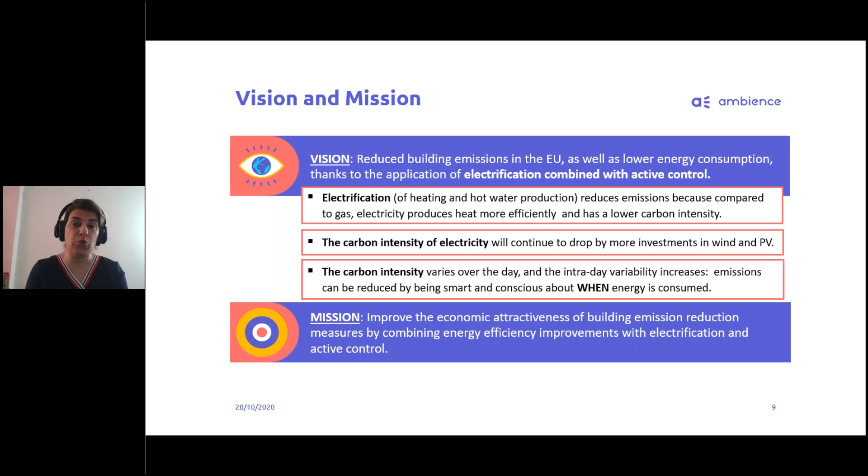So by encouraging the installation of local production, or encouraging the investment in renewable resources, alongside the electrification, which gives us flexibility in order to combine the consumption with this uncertain amount of production, we can achieve both the flexibility that we want and the lower CO2 emission that we want. And these two aspects will give us the consciousness to optimize our consumption in a way to understand when to use this consumption and when to use these local resources that we have, further achieving cost savings and CO2 emission reduction.

The goals in Ambience project are first to extend the energy performance contract to include and incorporate demand response value streams by valorizing the flexibility that can be achieved in active buildings. And by active buildings, we mean those buildings that are equipped with meters, sensors, and ICT technology that help us to optimize the usage of already flexible resources such as storage or PV panels that are available in some buildings.

After that, we want to make this active building EPC concept applicable to a broader range of buildings. The current status is that mainly energy performance contracting is applied to public buildings or commercial buildings, and there are very rare cases of residential buildings, even though those have single management and single owners, such as social housing. So what we want to do is to extend this application to a broader range of buildings, as well as extend it to cluster buildings and try to add the concept of energy community to this aspect.

And in order to do so, we are also developing a tool that supports the forecast of demand response value streams by evaluating and estimating the amount of flexibility that can be achieved in the contracting phase, and then supported with the matching measurement and verification methodology for the operational phase, in a way to guarantee this added value stream for those that are going to be involved in this project. We are also going to validate this concept and the tool that we are developing in 2 pilot buildings in Portugal and Belgium, involving real buildings and real ESCOs.

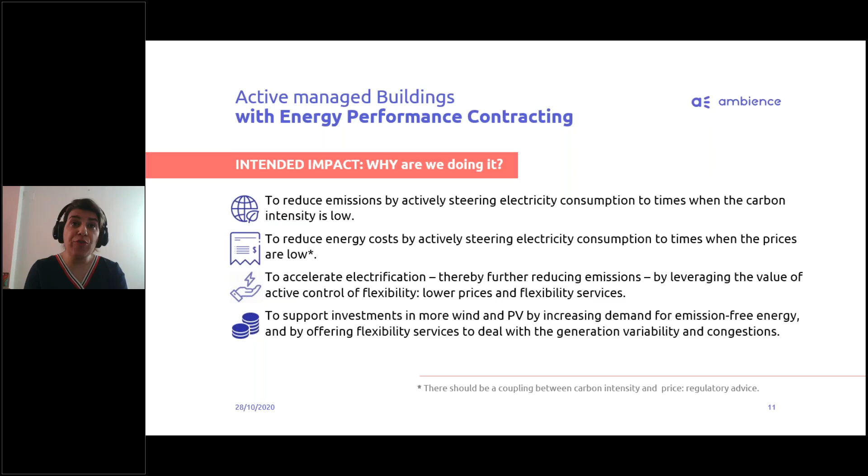And as I mentioned before, the expected impact of Ambience project is to reduce emission by actively steering the electricity consumption to times when the carbon intensity is low, as well as shifting it to the times that the price is low, so that we could reduce the total energy cost. And by adding this to the business case and supporting it with a proper business model, we want to support the investment for accelerating electrification in the building sector and encouraging the investment in renewable energy resources to achieve that ultimate goal of reducing the CO2 emission and encouraging the flexibility on the demand side and improving the demand response business case as well.

We have identified several beneficiaries in this project. One of them, of course, is environment and society, because our main vision being to achieve reduced CO2 emission, environment and society are going to benefit from that. Consumers: we are giving a main focus on the demand side, and the consumers, what their preferences are, what their comfort requirements would be.

So consumers would be one of the main beneficiaries, as well as other more general aspects of achieving a better cost-effective aspect in their buildings, having a better, more efficient building.

And one of the most important beneficiaries in these projects are energy system stakeholders, DSOs, TSOs, utility providers in general, because not only can they benefit from the investments that are coming to their sector for installation of wind and in general renewable resources, they can also leverage this flexibility that is being added from the demand side, and they can use it for the operation of the system.

And of course, ESCOs, being the main actor in the energy performance contracting scheme, with an enriched business model and an enriched business case, they can achieve better prospects in their activities.

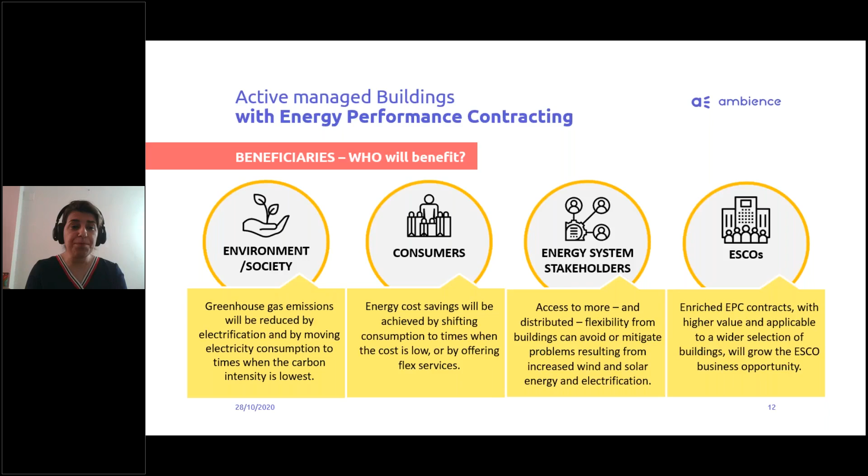Ambience project started in June 2019 with 8 partners from 4 different countries and from research and commercial sector. We are in Portugal, Spain, Italy, and Belgium, and this project is going to continue until May 2022. It has been funded under European Horizon 2020 calls, and it has a budget of around 2 million euros.

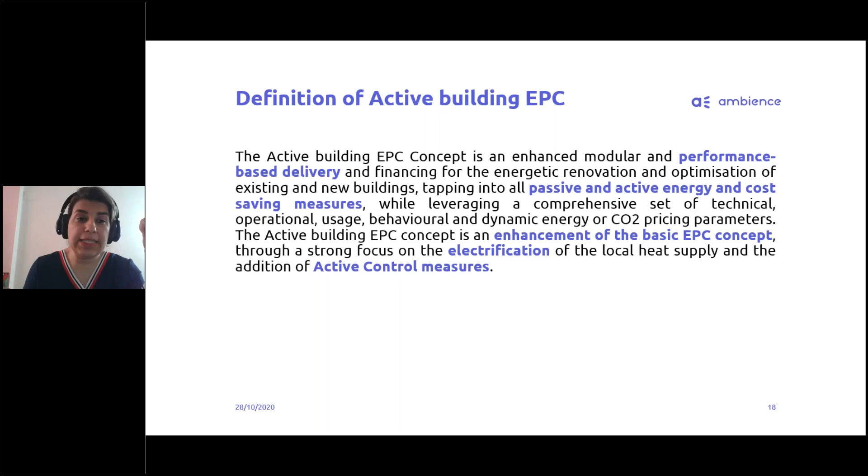There's also another aspect that we need to consider, which is that our proposal is a modular one, and this helps it to be applicable to already existing energy performance contracting, so they can only take the modules that are necessary for them, or they can start a whole new active building energy performance contracting on their own. And of course, we are considering existing buildings and new buildings to be able to be incorporated in this new definition and concept.

So there are three main pillars for this new concept. First of all, extending the energy performance guarantees from energy efficiency to also flexibility related measures; extending it to a broader range of buildings, residential, hospitals, educational centers. And the third one is to extend this scope to a cluster of buildings, adding the local energy communities and what could be the business models that could emerge from having these energy communities.

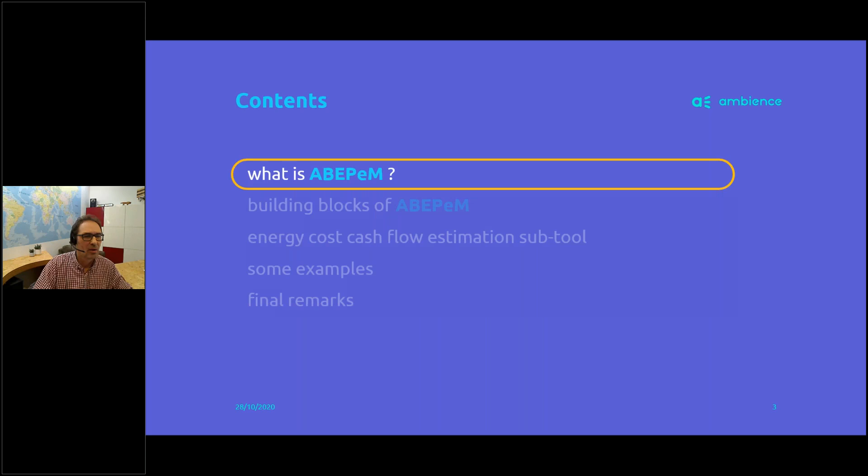ABEPeM is, in my opinion, still very difficult to pronounce, but it is the acronym standing for Active Building Energy Performance Modeling Platform. And we try to achieve three main things with this platform. The first thing is we are calculating the operational cost savings and performance KPIs when you want to do certain renovations, and that will be used as a basis for the guarantees which will later be defined in the contract between the ESCO and the final customer. Secondly, it will help you to calculate the financial viability of your renovation, including standard renovations or renovations which include smart control.

And third, it will be used again at the moment that the renovations are done and you are in the performance phase, the performance evaluation phase of your project. A couple of corrections might be needed.

The very simple example might be that in the contracting phase of your project, your customer tells you that it is an office space which is manned typically on weekdays from 6 o'clock in the morning till 7, 8 o'clock in the evening. And suddenly during the performance phase, you come to the conclusion that he converted it into a call center which is manned 24/7. So that might have quite an impact on the energy consumption and so on.

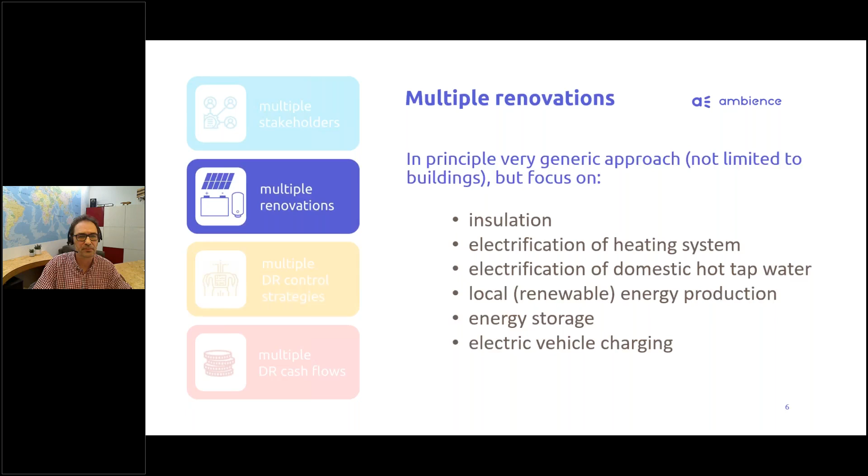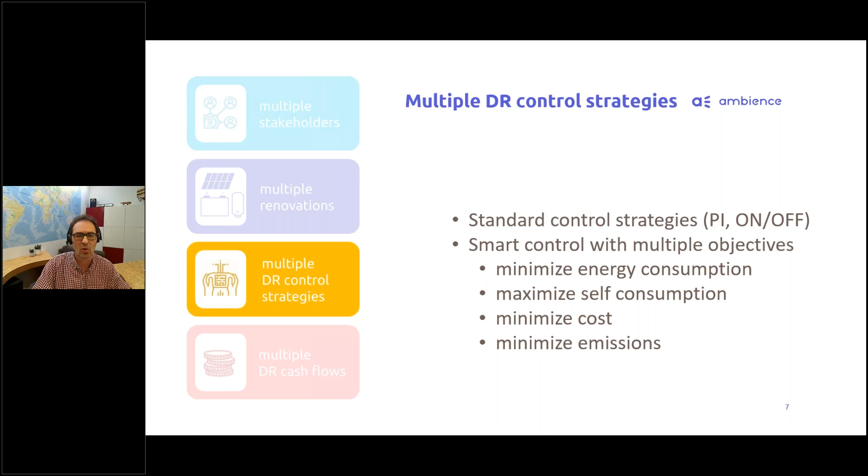We will be able to do some calculations for very standard control strategies, just simple on-off control of devices, but also the advanced ones we need in the context of demand response. So we support smart control with multiple objectives, whether you want to minimize energy, maximize self-consumption, minimize your cost, and so on. In principle, we try to support that all.

And last, we have at this moment quite a focus on indirect demand response schemes, where we try to motivate customers to change their energy consumption behavior based on some price incentives. Whether these incentives come from variable prices over time or time of use, or differences between injection and offtake tariff, trying to reduce peaks and so on. That's all supported, but there's quite a focus on the indirect demand response scheme in the platform at this moment.

And that brings me actually to the first poll. What type of demand response do you think is the most suitable in buildings? Do you think it is rather direct demand response, typically a contractual agreement between the building owner, maybe the ESCO, and an aggregator where he contractually has the possibility to switch off some devices if the conditions in the grid are asking for it? Or indirect demand response, being more incentive price based? Do you think both are suitable, or you don't really have an opinion on that one?

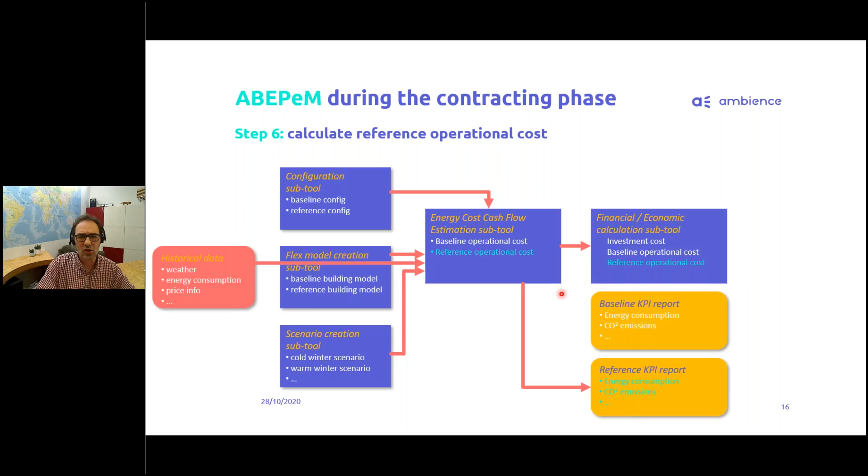That information is also given to the financial economic calculation subtool, and by subtracting the two operational costs, you know your operational cost savings. The financial economic tool then knows the investment costs, knows what the operational cost savings are, and can then generate an investment report where all the typical numbers which financial people like, net present value, return on investment, and so on, are nicely represented.

It's also in this part of the tool that we can define the role of who we are looking at in this project. Are we talking about an owner of the building? Or do we look at the return on investment for a financing company, and so on? So that's all configured in the financial economic calculation subtool.

Good. What I explained to you here is all during the contracting phase. All the information which is generated here is used by the ESCO to get a good feeling about what he can promise to his customer. They make an agreement, they start doing the renovations. After the renovations, you are going to evaluate whether you stick to your promises. And that's the second time that the platform will be used.

We are collecting operational data that is given to the guarantee assessment subtool, which does a couple of reruns on the energy cost cash flow estimation subtool in order to make some corrections on the actual KPIs. So we have corrected KPIs, and it's the input for the IPMVP report, which can be used in the discussion with the customers to evaluate whether the promised results are achieved after the renovation of your building.

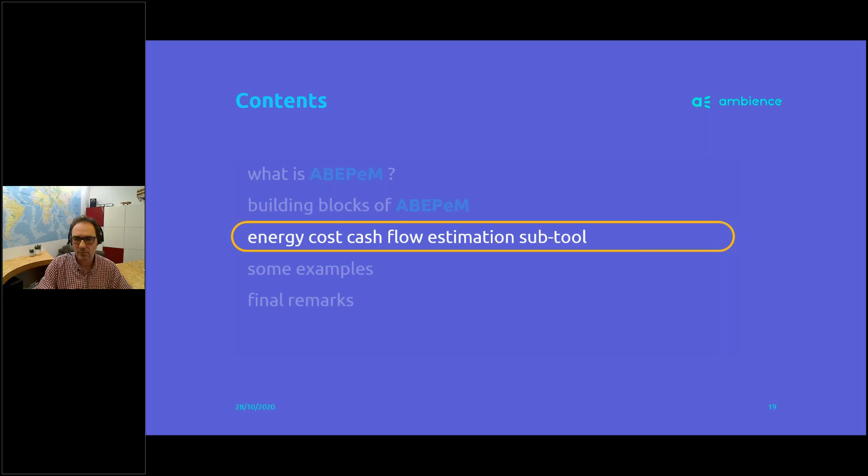This part, the energy cost cash flow estimation subtool, is based on a multiple collector concept. What we do is start identifying which commodities we have in the building. Typically, you will have electricity, you will have gas, you will have hot water for your heating, maybe you have cold water for the cooling of your building.

Then we start adding commodity consuming devices to that collector system. Typically, there will be what we call uncontrollable load, all the devices which consume electricity but you cannot really control from a demand response point of view. You'll have space heating, which uses hot water. You'll have hot tap water. You'll maybe have the use of cold water to do the space cooling of your building.

Then we go to the commodity producing devices. Typically that will be, for example, PV panels on top of your building which will produce electricity and inject it into the electricity collector.

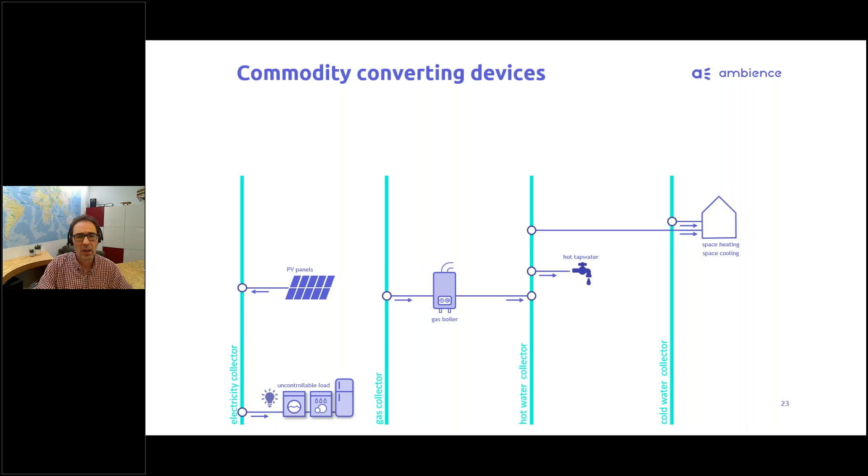Then we have commodity converting devices which we add to our model. Typically that can be a gas boiler before renovation, a heat pump after renovation, maybe a CHP if you have a big building where you have an interaction between three commodities. You produce electricity and hot water starting from gas, your air conditioning system, and so on.

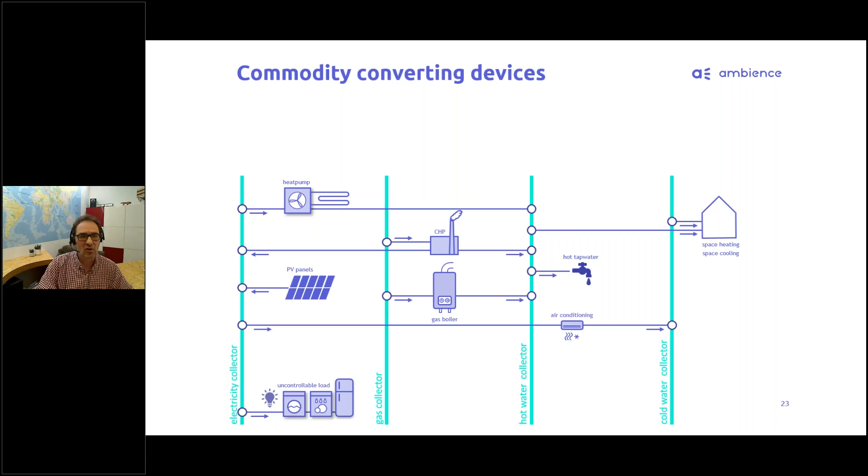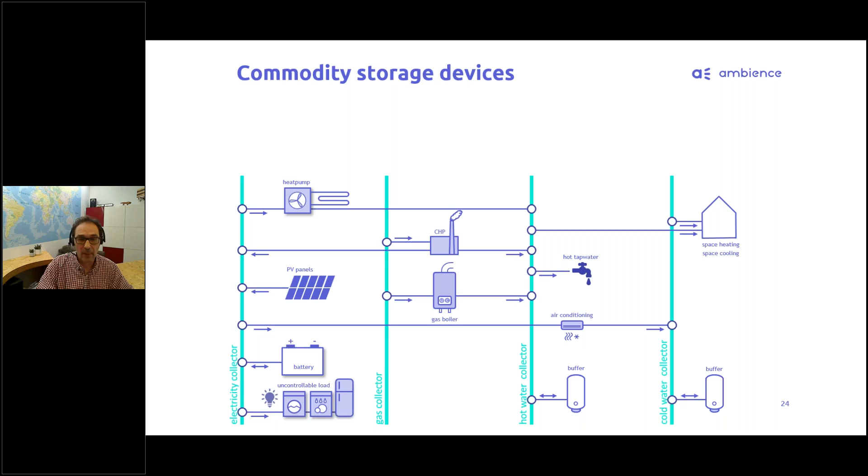Then the last group are the commodity storage devices. You can add batteries at the electricity side or buffer tanks on hot and cold water to store these commodities. Of course, most buildings are not in island mode. They are typically connected to the outside world.

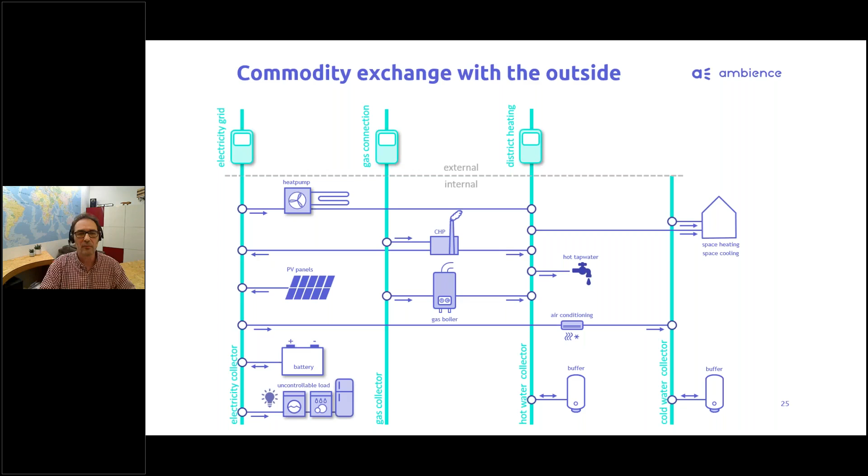So we allow, of course, interaction with the electricity grid. You'll have to buy gas from the gas grid, most probably, if you have a gas boiler. And there is even the possibility that if you have hot water in your building, you're connected to a district heating system. So that's the exchange with the outside world.

And then we are going to do operational cost couplings to all these commodity flows. Of course, electricity will cost money if you buy it from the grid. Maybe you get a tiny bit of money when you inject in the grid. You'll have to pay for your gas. You'll have to pay for your district heating hot water. And maybe you can even inject a tiny bit in the district heating system when you have excess heat available in your building.

Keep in mind, we can not only couple costs to the exchanges to the outside world, but any flow inside the building can have a cost coupling as well. An obvious one, for example, could be the PV panels. It's perfectly possible in a certain business case that an external investor put the PV panels on top of your building, and that you don't have to pay for the investment, but that you have to pay for the electricity which comes from the PV panels for local use, hopefully at a lower price than buying it from the electricity grid.

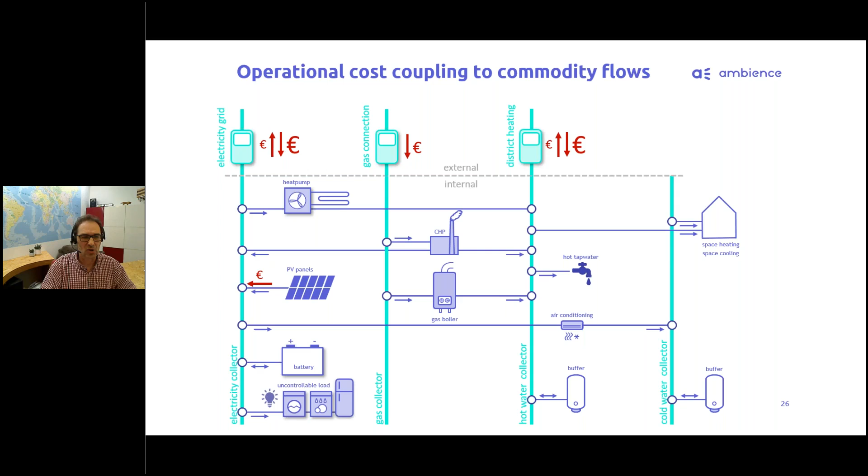So that's actually how we built up, in a quite generic way, our simulation model. Keep in mind, the collectors I show here are just examples. If tomorrow hydrogen gets very hip, we can perfectly add a hydrogen collector there, or whatever commodity you need in your building can be added in a very flexible way in the simulation tool.

Good, that gives us what we call the building and infrastructure simulation model. We make two versions of it, one before renovation and one after renovation, which we will then run a couple of times through the platform. As any model, we have a whole bunch of non-controllable inputs, typically weather data and so on. But we have quite a couple of controllable inputs. Typically the heat pump control, buffer charging and discharging, charging of batteries, heating control in the building, that kind of things we can control.

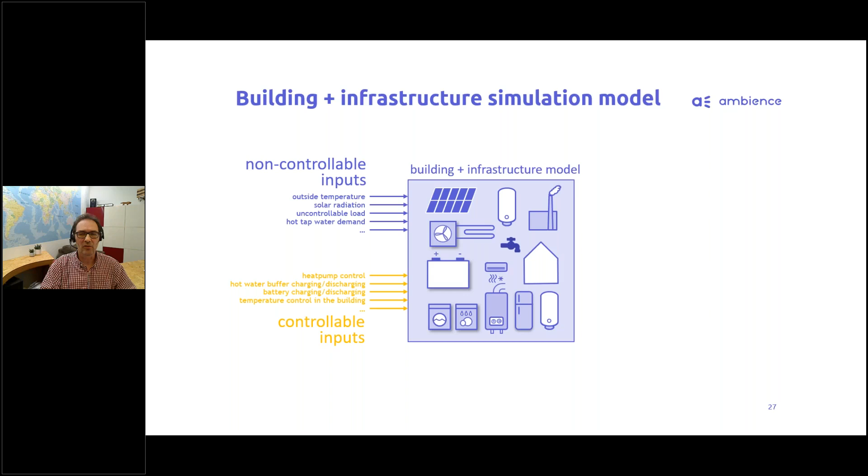The model will then, based on these inputs and the internal states of the model, generate a whole bunch of outputs, internal temperature in the building and so on. And also keep track of all the commodity usage in our building, where the costs are associated to, so that every time we do a simulation run, we get a clear view on all the commodity usage and cost.

Good. The model is reused three times in the approach we have in Ambience. The first time is in the contracting phase, in the sub-tool I just explained, to estimate the value which can be achieved for the customer. Second time is in the operational phase. When we are actually going to control the building, we use a model predictive control approach, which uses this model again. And the third time is in the performance phase, where we can do a couple of reruns in order to validate the promised performance to the end customer.

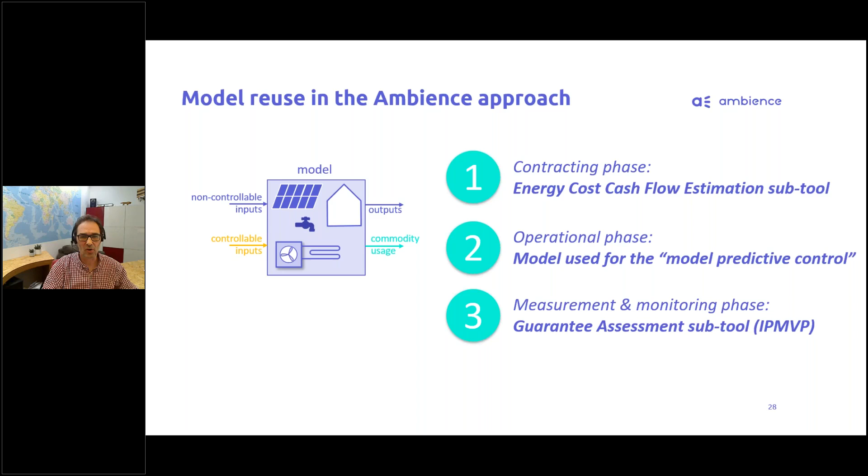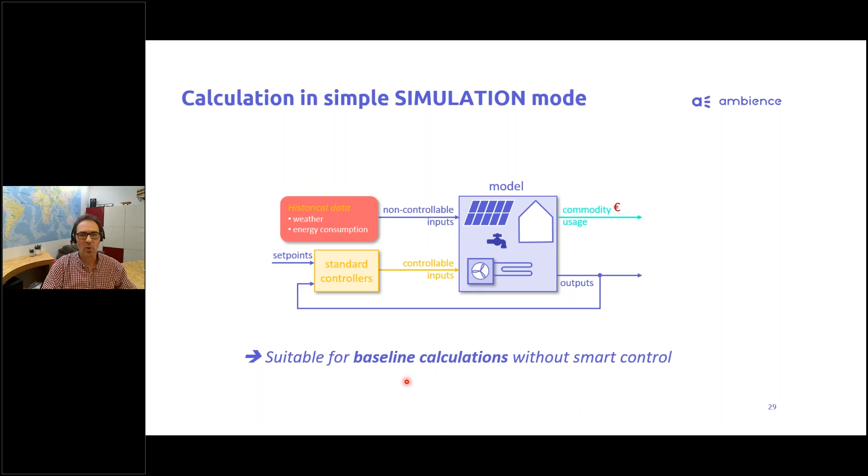Good. There are a couple of simulation modes we support in the tool. I'm going quite quickly over them. You can do simple simulations, just standard control. This is typically very useful for baseline calculations. Typically, you have a heating system which just goes on and off, doesn't do anything smart.

We can run in full optimization mode. That means that we can calculate the maximum achievable value of all the smart devices in the simulation model. It's a pure optimization where you know perfectly well how all the data is going to evolve. It typically overestimates the value of what you can achieve, but it's still very interesting because it defines very well the upper bound of what you can achieve in your building.

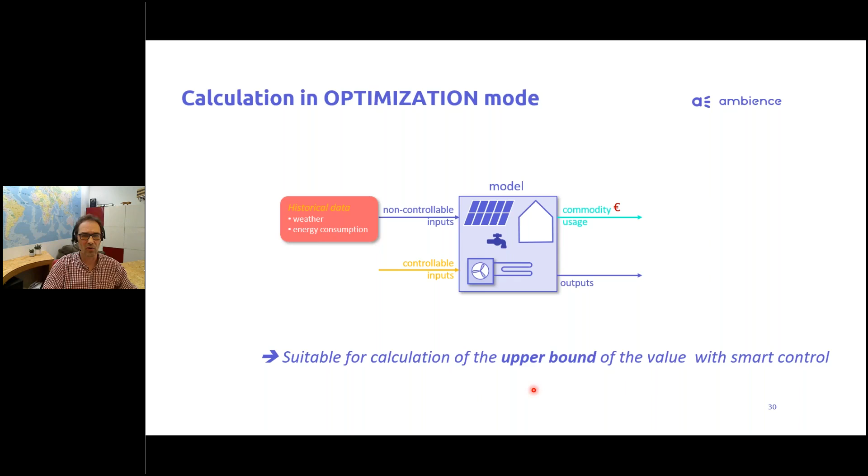And then the third one, that's a pretty advanced one. We're still working on that one. I'm not going to try to explain this. Either you know what MPC is and this slide speaks for itself.

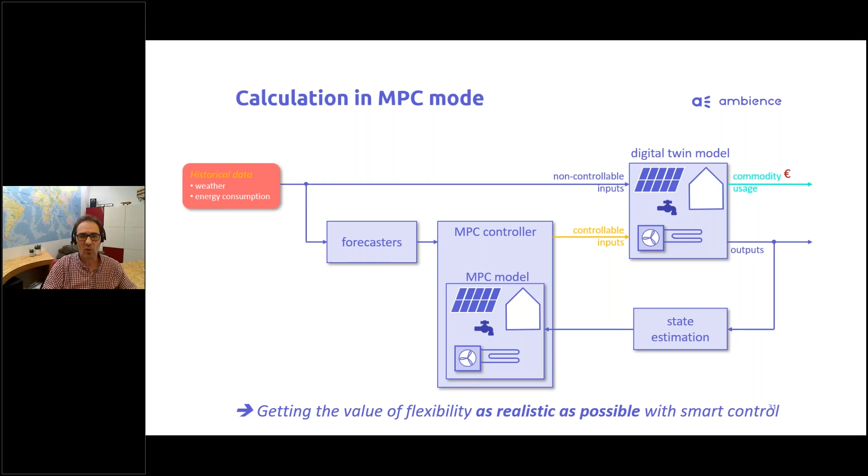If you don't know what MPC is, then you only have to remember that we do this in order to get a value out of the tool which is as realistic as possible of what we can achieve when we are actually going to implement it in the building.

Then, as I told you before, we need thermal models. The thermal modeling is all simplified RC models. I'm not going to talk too long about it. Just keep in mind we have two approaches. The first approach is that, based on historical data, we have a gray box modeling tool which can fit these models onto the actual data.

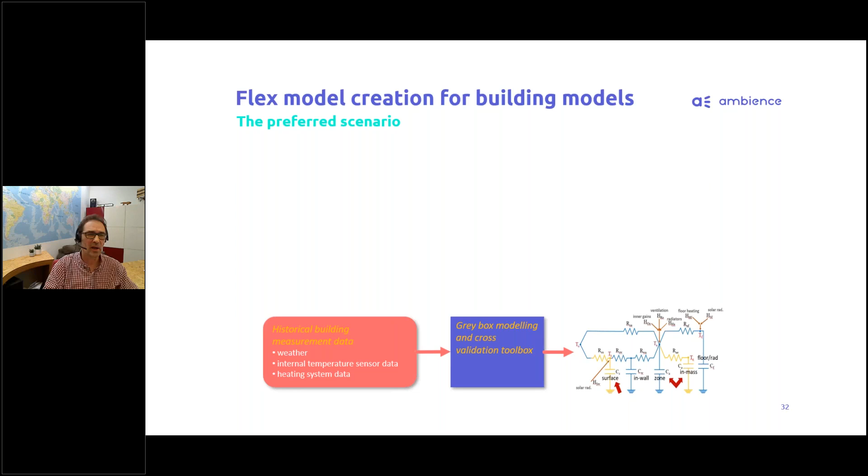We are very aware that older buildings don't have a lot of data available, so we have an alternative path in place where we start from the building plans, from standard building stock information and so on to generate data for that gray box modeling toolbox. We have been using this already in other projects, and that works quite well.

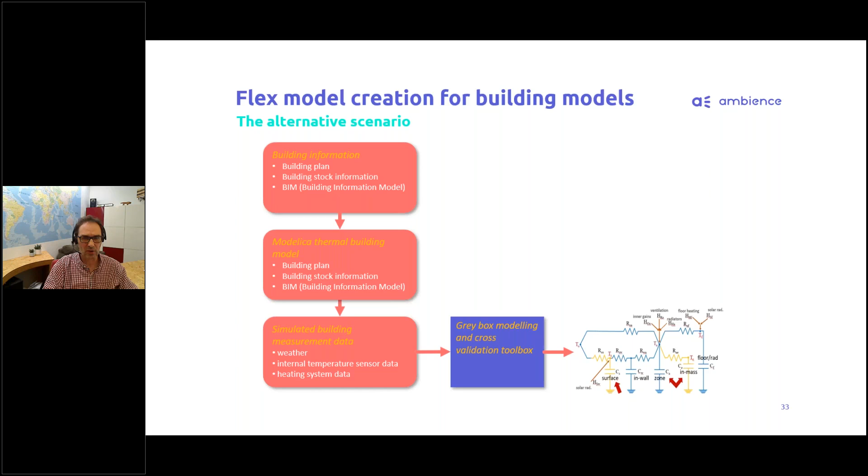Good. Maybe all this was a bit boring and you want to get a better vibe of what we try to achieve with our tool. I hope I can come to that in our example bit. I'm going to start with a very simple example, and I am only focusing on the business case for one day, not so much because we can't do better than that, but because it makes it very tangible what we actually do in the platform.

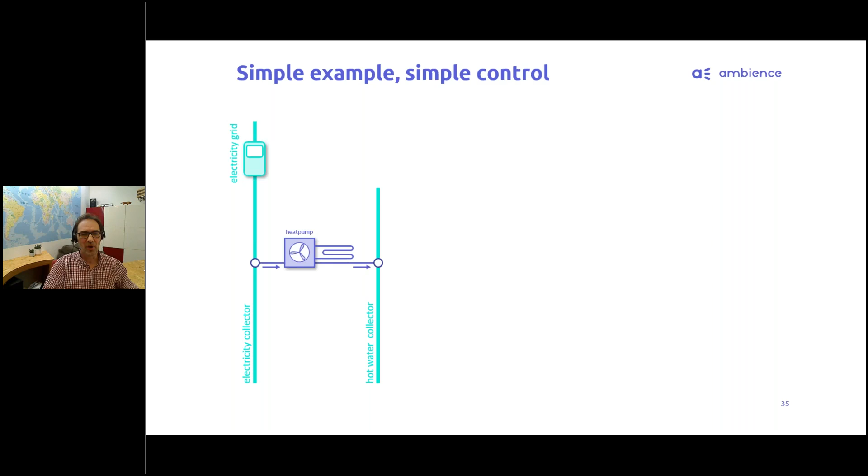We have a configuration: we are considering a house which has electricity, it has hot water. The heat pump makes sure we have the hot water, we have tap water consumption, and we have PV panels in our building. That particular day, it's quite a sunny winter day. Keep in mind our PV panels produce about 29 kilowatt hours of electricity during the day. We have a bunch of uncontrollable devices. They consume electricity a bit during the day. It gets a bit more from 4 or 5 o'clock onwards.

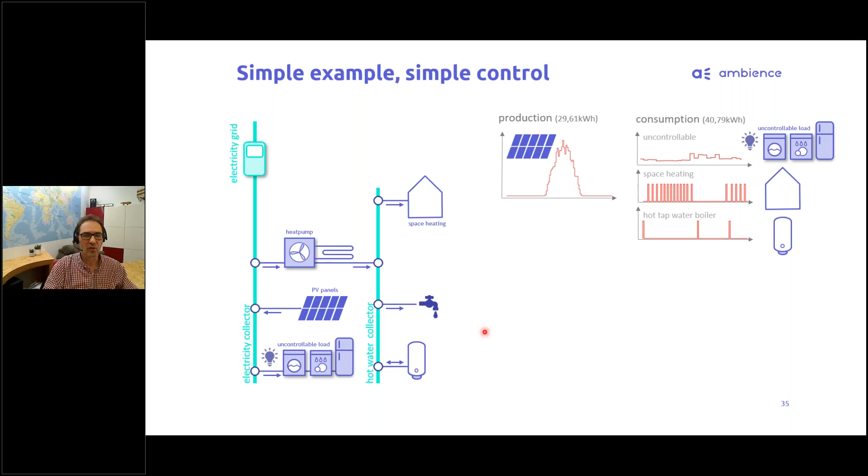As usual, we have space heating in our building. This is the reference simulation, so the heating system just switches on every now and then to keep the temperature in the house comfortable. In the afternoon, no heating is needed because the sun is taking care of that, and then in the evening it switches on and off again a couple of times. Then we have a hot tap water boiler. There's not an awful lot of hot tap water used during that day, so it switches on at 3 quite random times during the day.

And then we have an electric vehicle which is plugged in at some point in time. It's just charging till the battery is full. This is the reference or baseline simulation where we don't do anything clever yet. And you see, of course, that we don't take advantage very well of the big PV production peak here. We see a lot of electricity consumption before it and after it, and in practice, out of our 30 kilowatt hours, only 10 kilowatt hours is consumed in the building itself, and 2/3 of it is injected in the grid.

Now, why I showed this simple example is because you have to keep in mind that all the simulations we do are data driven. So we are going to step by step calculate what is going to happen in the building based on historical data, or based on forecasted data in the MPC approach. So we can, of course, do better.

If we make it all smart, we make the boiler smart and the space heating smart, and we do smart charging on the car, you see, of course, what happens. The uncontrollable load and the PV stay the same. The space heating tries to buffer some heat in the building, in the building walls. It tries to push it to the maximum allowable temperature without violating constraints there. And the boiler starts charging at a smarter moment in time.

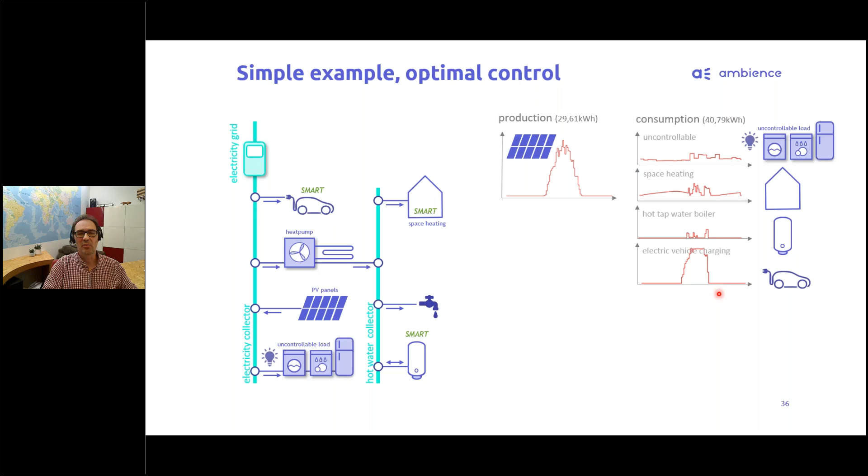The electric vehicle charging starts a bit later at a bit higher power in order to come to the perfect, of course I picked out a perfect day to show off what an optimization can do. Of course, no injection in the grid anymore. So that's in order to show how the tool actually works: calculating all these time series, doing the control, doing the optimization, really on the time series.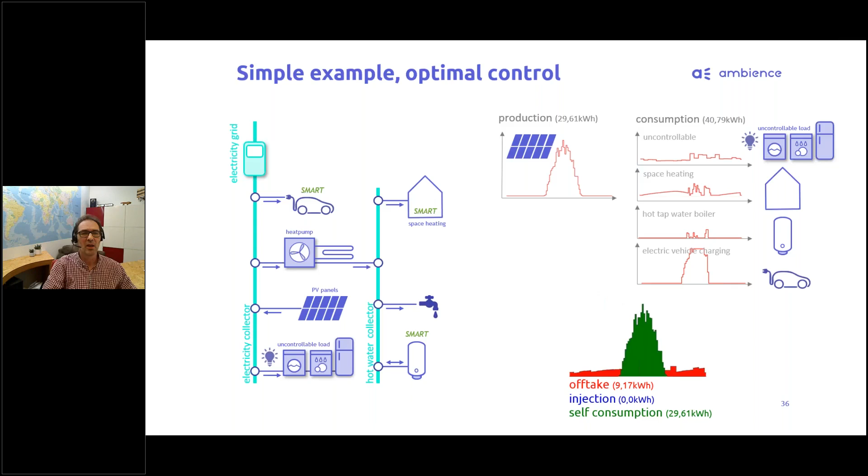A more realistic example of what we can do with our tool is shown in the next example, where we have an example renovation of a family house. Again, we have electricity, we have gas before renovation, and we have hot water.

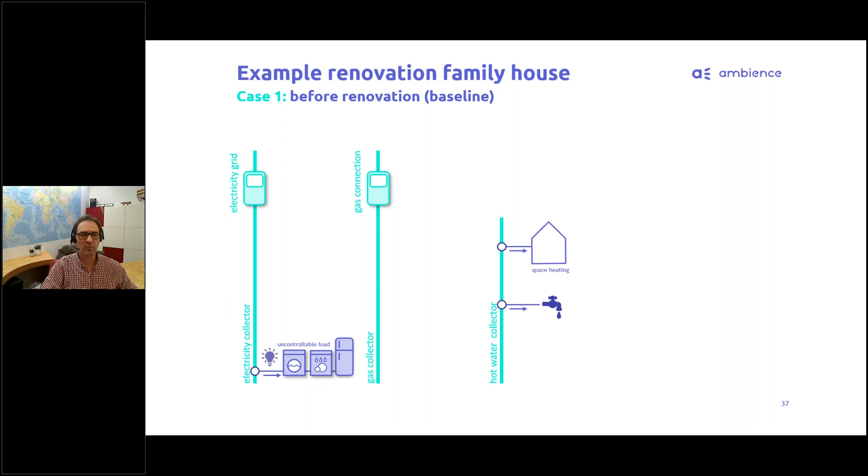The uncontrollable load, we have space heating, we have hot tap water, we have a buffer for the tap water. In first instance, the house is still heated by means of a gas boiler, and the setting is in such a way that we pay about 26 cents per kilowatt hour. Our residential price is 26 cents per kilowatt hour for electricity and about 5 cents per kilowatt hour for gas.

So in the first run, before renovation, before we do anything smart, we can calculate on a year basis that the estimated gas cost is about 1,600 euro, electricity will be 960, in total 2,600 euro per year.

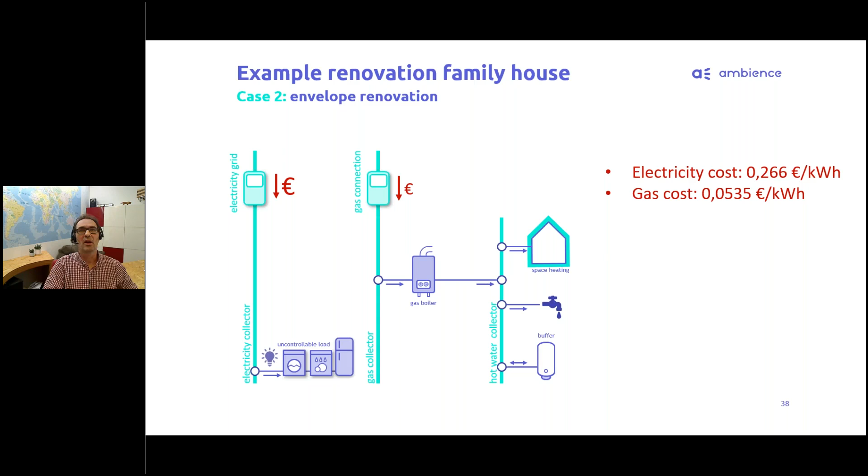Then we change our configuration, that is our reference configuration, where we do first an envelope renovation. So you see here, we insulated our building, we put insulation in the roof, we changed to double glass in the windows, of course with the same prices, where you see immediately the impact on the gas consumption, which drops quite a bit, which results in a first cost savings of 39%. So that's a first after renovation estimation of costs we will end up with.

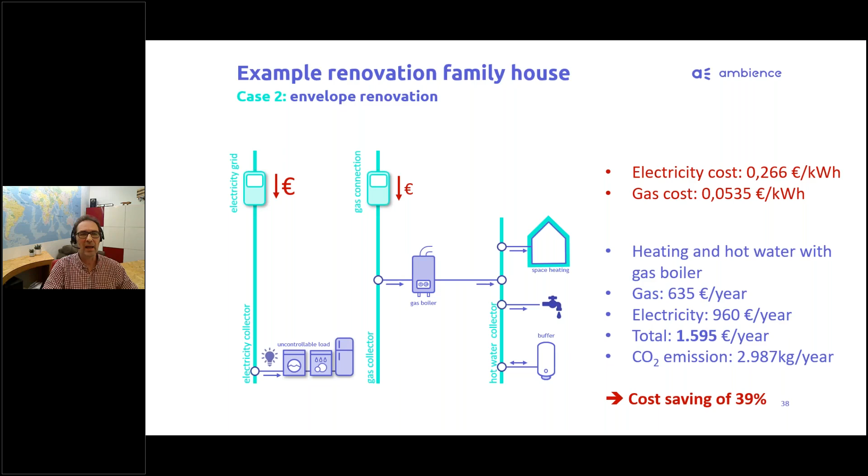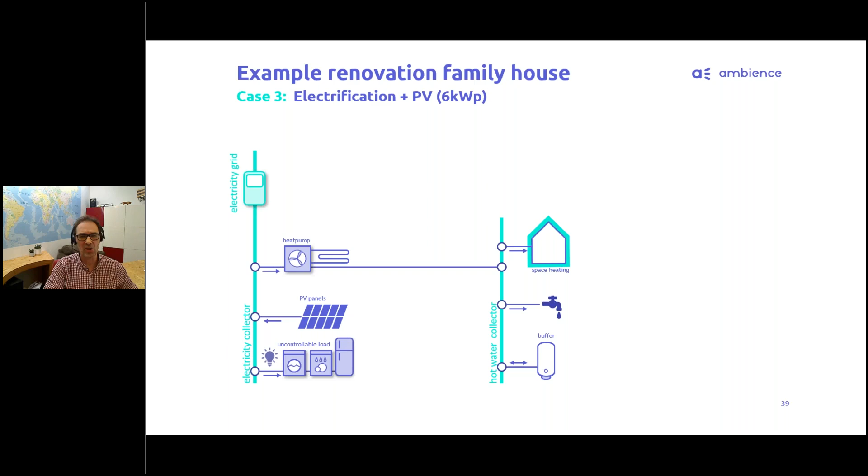But we can go step by step, adding elements to our renovation. The second one is we are going to do electrification. We are going to add a heat pump and PV panels to our configuration. We stay with our insulated house. What you see happening now, important here is that we now assume that you can inject some excess electricity in the grid at a price of about 9 cents. That's rather high. In later simulations, we lowered that a bit to be a bit more realistic.

What you see here is, due to this electrification in combination with PV panels, we can have a further cost saving of 28%. And the last step, and that's the one which is very relevant for our project, is we add the smart control. We add a smart controller which is going to optimize the behavior of the buffer tank here and the heating system in such a way that you make maximal use of your locally produced renewable electricity.

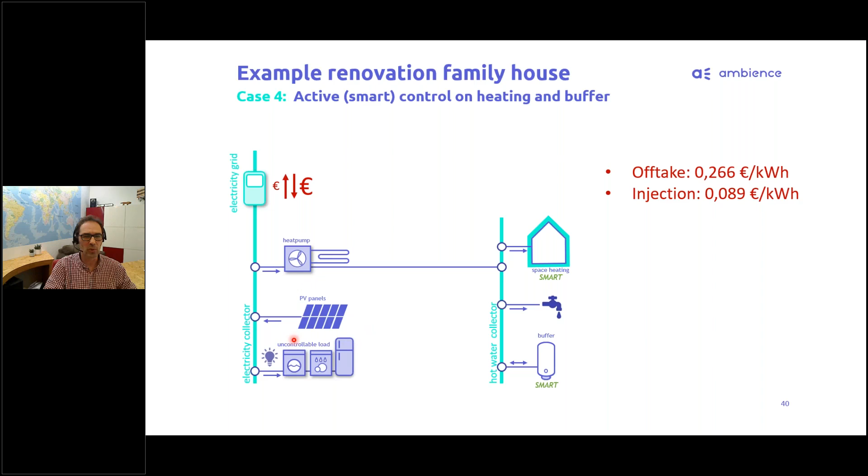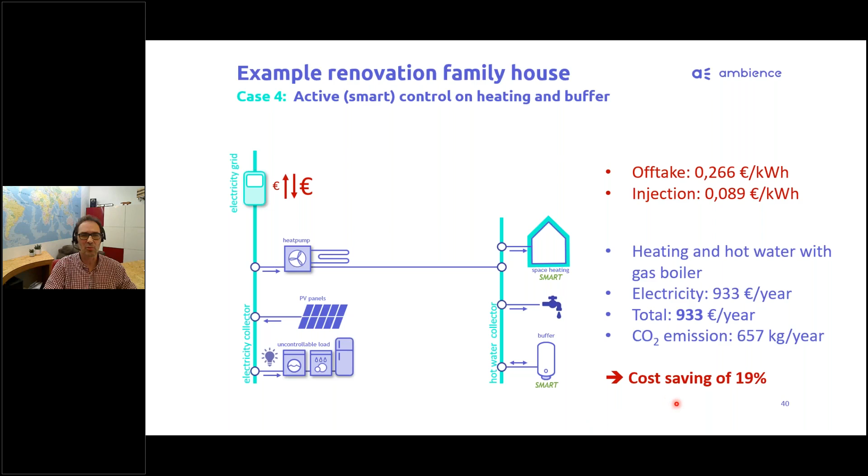What you see happening here is that you have a further drop of your electricity cost. So in the previous one, it was 1150, down now to 933 euro, or an extra 19% extra cost savings. Keeping in mind that that is for an investment which might be rather small. If you already have like a renovation with modern new devices, adding that smart control does not have to cost an awful lot, but can give quite an additional savings at the end of the line.

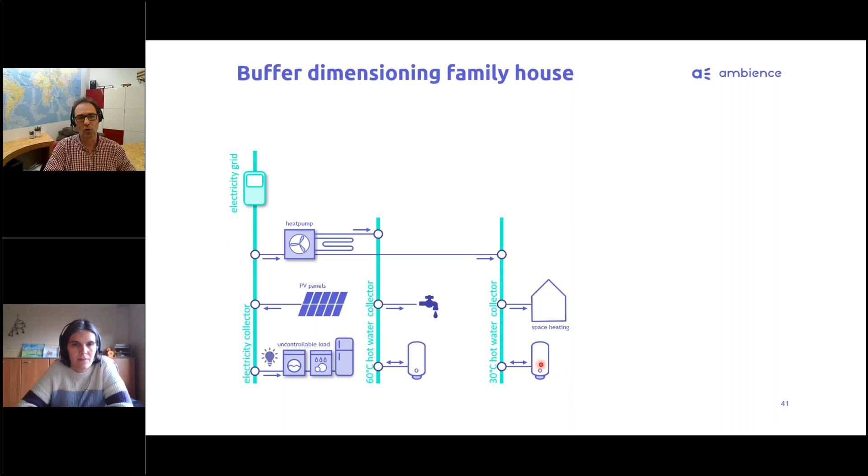Okay, then the last example I have is how we use the tool to do some buffer dimensioning in a family house. It's kind of a very similar configuration, but with two temperatures in the house, one for tap water and one for the heating system in the house. And the question is, what's the best investment, to put a buffer tank on the high temperature collector or on the low temperature collector? So a couple of buffer sizes are checked here.

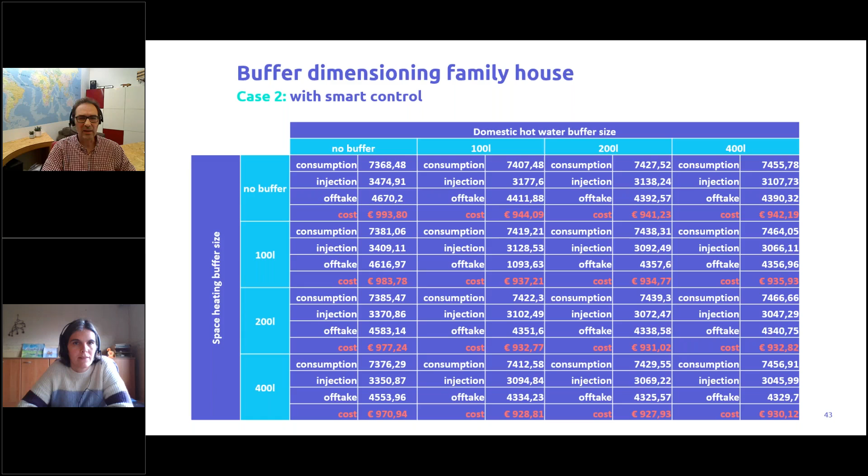When we add the smart control, however, you see that even without buffers, we drop from 1,100 to about 990 euro. There we only use the flexibility into the building mass, in the building walls, in the heating system itself. You see further a drop when you add a hot water tank on the domestic hot water system of about 50 euro. And if you make the tank bigger, it does not really help an awful lot. You see that the impact when you add a space heating buffer, which works at lower temperature, is way less in this case. Just to give you an idea that our approach can help you in the sizing of appliances in a demand response context.

I have two final remarks. I see that my time is nearly finished. Maybe something about the status of our platform. I told you it consists of quite a number of subtools. All subtools don't have the same status. So the Flex Model Creation subtool, the Energy Cost Cash Flow Estimation subtool, and the Financial Economic Calculation subtool are quite well on their way.

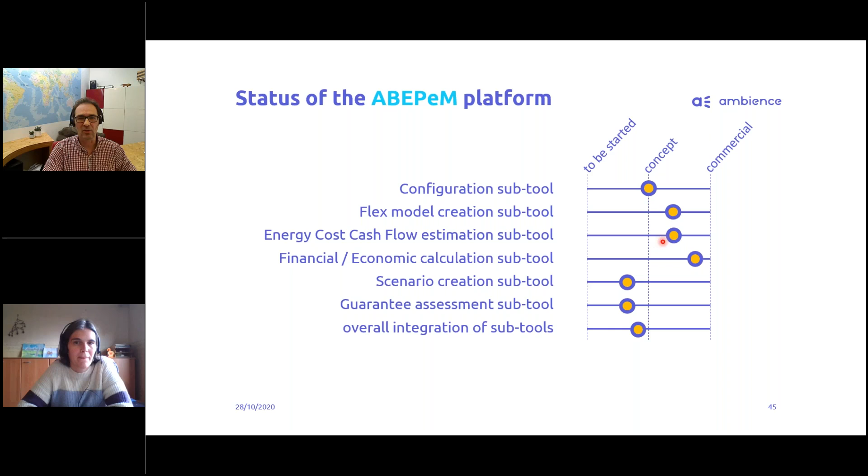We've proven the concept, and it's working pretty well. Configuration, yeah, it works, but there is still room for improvement. And the lower three here, the Guarantee Assessment subtool and the overall integration of the subtools, can still be better. Just to indicate to you that we are developing a concept and everything is not fully in place yet, but we are definitely in place to show some first results.

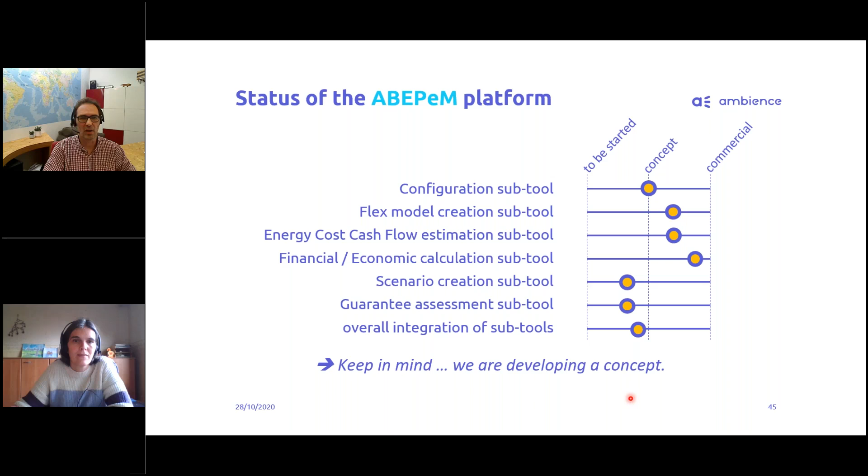Last but not least, how do we proceed with this? The proof of the pudding is in the eating. So we are going to test in two very different pilots. The first pilot case is in very modern office buildings of EDP in Portugal, and a second pilot in Belgium will most probably be in a school building, which was built in the sixties and urgently needs renovation. So it is quite two different pilots, and it will be interesting to see how our approach will work in both cases.

And that concludes my presentation, Annick.

Okay, thank you, Jef. Thank you for revealing some of the features of the ABEPeM platform for us. I see that we have some questions in the chat, so I will go through them with you. The first one is on demand response and demand side flexibility. So the question is, if you are considering all decentralized energy resources in buildings, why are you just mentioning their demand response and not their demand side flexibility?